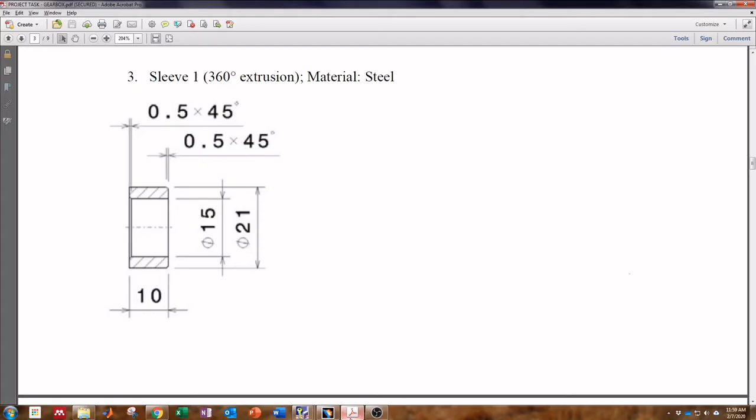The horizontal line will be our middle line when we want to rotate it against the horizontal line, and the last one will be this dimension of 21 divided by 2.

Next, before we measure the width, we should make sure that these two vertical lines are symmetrical with each other. By pressing Ctrl, we select both lines first, and then lastly the mirroring line or the vertical line, then click constraint definition and click symmetrical.

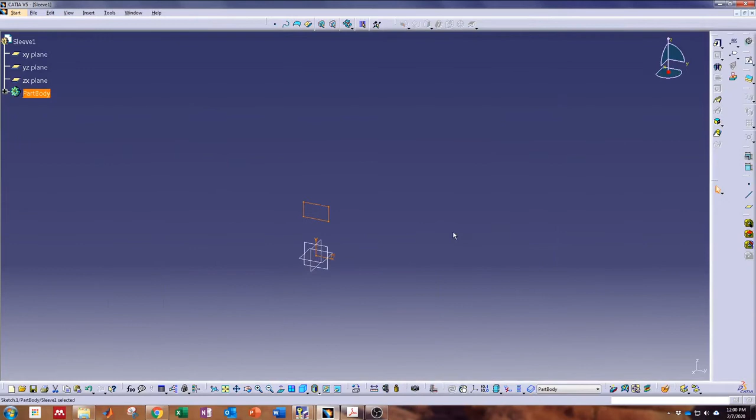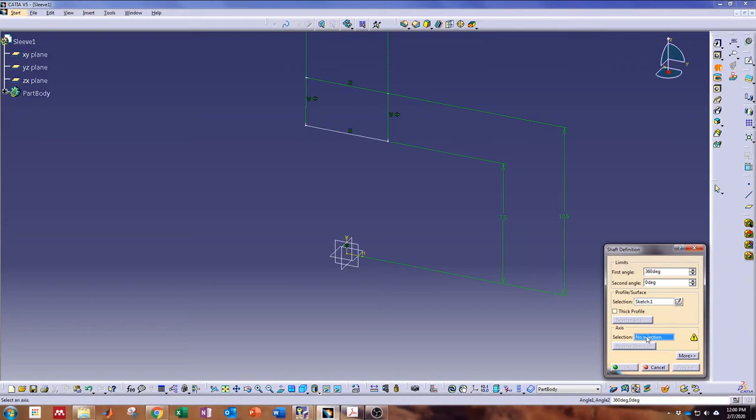So what we need to do is exit the workbench first, and then maximize it for a better view. Then by selecting the sketch and selecting the shaft function, 360 degrees will be automatically selected, so let it be. 0 degree also is the second limitation, no rotation, and then the axis of rotation will be the horizontal line.

You can click OK, or you can also change it by selecting the selection box here, right click, and then we choose the y-axis. So yeah, it's either way, you can change back to horizontal line or y-axis. Click OK.

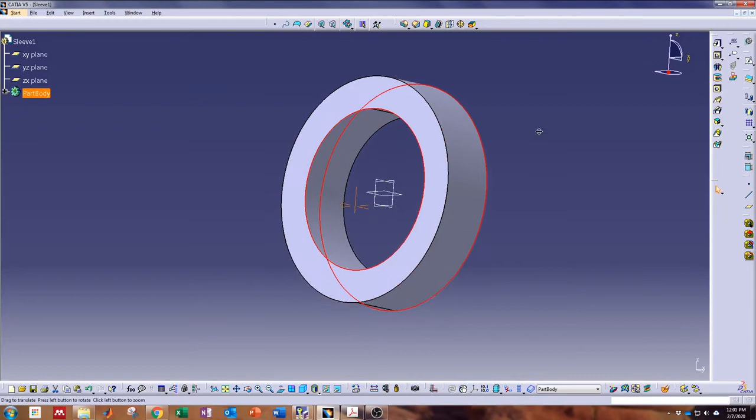So we have finished having our sleeve. Next, what we need to do is choose the outer line by pressing Ctrl, then choose the next line, the inner circle, and then go to chamfer.

Click chamfer. The length is 0.5 with the angle of inclination of 45 degrees. We click OK because the propagation is tangent, and we have our sleeve.

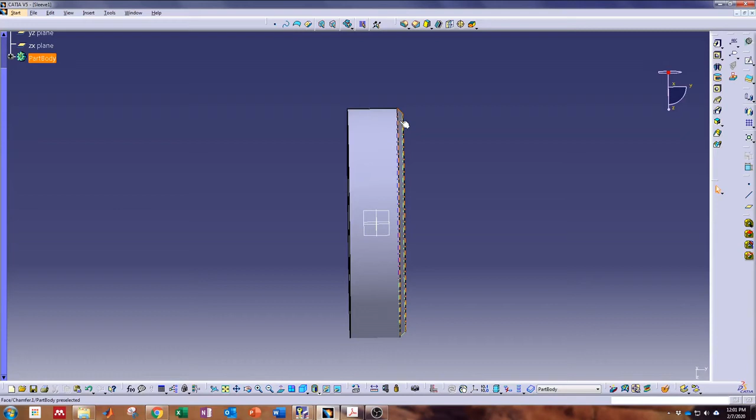So why do we need this surface? This surface will allow easy mounting on the housing, and this will be the space for the shaft to be inserted into the sleeve.

On this, by clicking apply material, we go to metal, select steel, and then select the part body, then we click OK. So we open the construction tree, we have the steel there, and next we can rename the part body.

By right mouse click, go to properties, then feature properties, we change it to sleeve 2115, apply. So what is 2115? 21 is the outer diameter, 15 is the inner diameter.

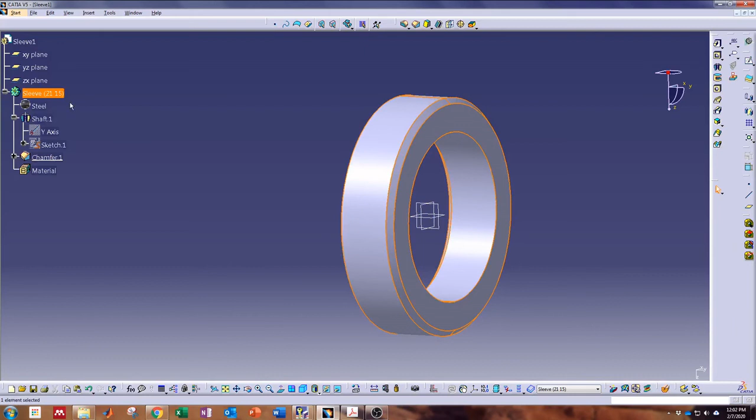Other than that, we can also change the color by using the shortcut Alt+Enter. You can also go to these properties, so change the color to green, and we click OK.

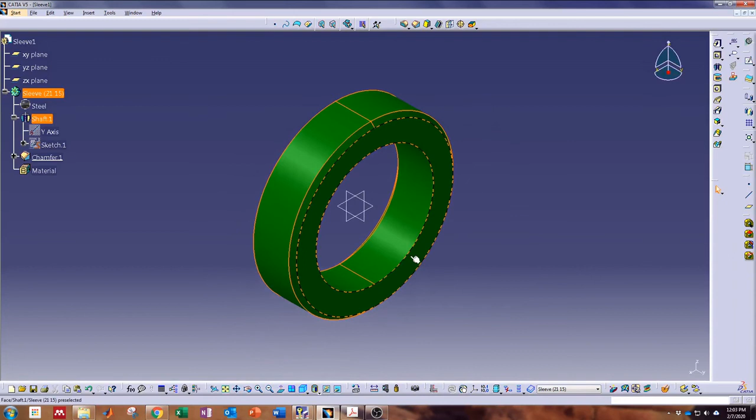Why do we need this coloring? It is very important when we have to assemble a lot of parts in one assembly, so the color will let us differentiate which part is which.